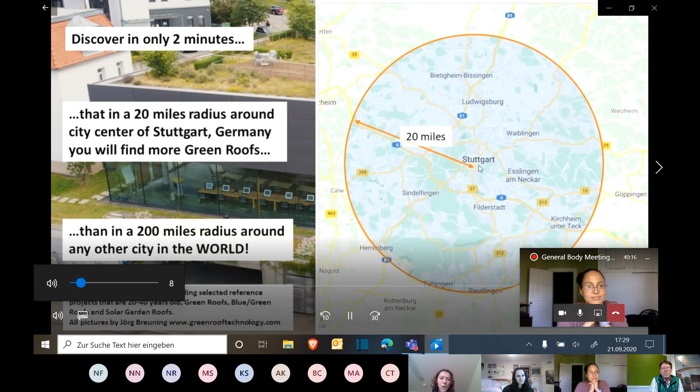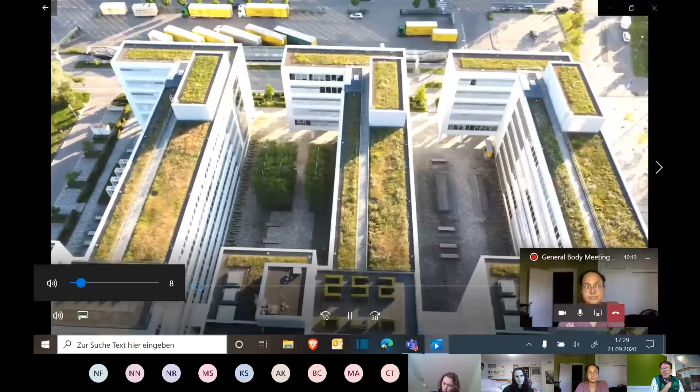This is a movie I took this year, mainly this year, with a small drone in Germany, where I obviously started my career in Stuttgart, Germany, pretty much 40 years ago, a little bit longer ago. And there's a lot of projects I actually did, and they are obviously still existing. However, I was impressed on my own how many green roofs were added in the last 20 years since I'm in the US trying to do the same thing here. So on one hand side, it motivated me to do more here, but on the other hand side, I was also a little bit disappointed because in a 20-year time frame in Germany, the market for green roofs increased super proportionally comparing to the US, where it is still a very slow or very hesitant market.

So we will see some of these pictures also during the presentation again, where I say a little bit more to that. A lot of these buildings are actually schools and universities. They have a very high percentage of green roofs, and combinations of green roofs and solar.

This is, by the way, one of my first projects. I did that in 1982. This is a hospital. That's an incinerator for the trash.

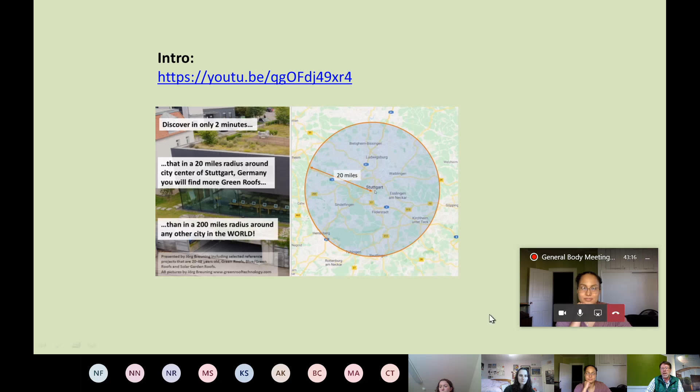So I am working in this business, in the green roof business, but I also started in the landscaping business, which in Germany is actually also responsible for green roofing. So you have to have landscaping certifications, or be a certified horticulture technician, which I am. I started on the 1st of September 1980. The education for landscaping goes 2.5 years, and for the horticulture technician, you need the landscaper trade, then work 3 years in a company, then go back to university for 2 years. So it takes around 7 years to get this title.

In the US, you can get this title in around 6 weeks online. Just saying, that's the difference. So when somebody asks me whether I'm a landscape architect, I typically say yes in the US, because my qualification is so much higher than any landscape architect in the US. However, I cannot get a certification in the US as a landscape architect without running through the typical school system, so I don't have that.

Long story short, about 20 years ago I got a call from an American company, a very small engineering firm, asking me for a green roof on a project in Chicago. I thought this was super exciting, and since I like to travel anyway, I booked a flight to Chicago maybe 3 weeks later to meet this guy. He was from Philadelphia, kind of a crazy guy, but he was talking about the City Hall project in Chicago. We went up there, and I was convinced we could make this project and get the contract.

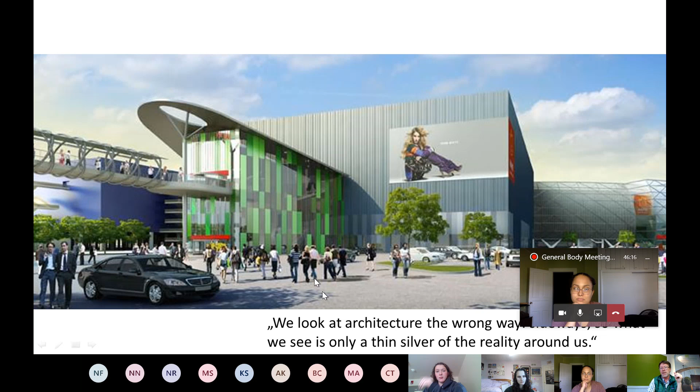I want to start with a point: right now, I want to change your view of things. Right now we are looking at architecture from a ground level—I call it almost a two-dimensional level. So everything might look nice, and we ask ourselves, why do we need green roofs when we potentially have a lot of green, in this case more green color in the picture than other things? So we have to basically change our perspective.

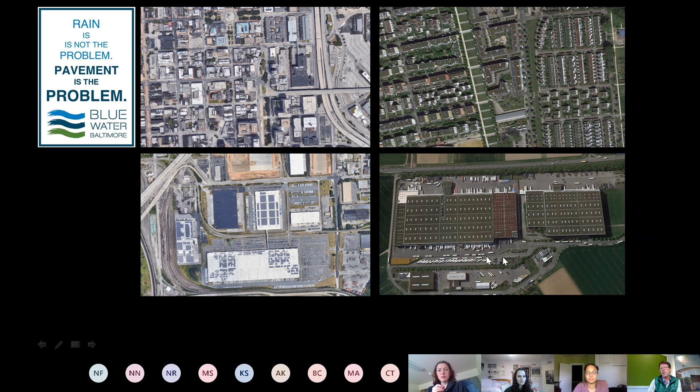And a warehouse in Baltimore. This is 2.5 million square feet, or 57 acres. The roof has around 1 million square feet. On this entire property, there are only 6 trees. The annual runoff of this property is around 61 million gallons, approximately 100 Olympic-sized pools of water running off this property directly into the Chesapeake Bay, which is the 3rd largest estuary in the world and the largest in the US, a very important environment.

On the other hand, this building was optimized for stormwater retention. It has pretty much the same roof size as the property I just showed, but around 1,700 plus trees around the entire property. The annual rainfall is almost the same as in Baltimore, but the annual runoff is only 10,000 gallons, which is a semi-tank truck. So that's a big difference to see.

So green infrastructure and green roofs can make a really big impact. Also, cost-wise, this company, with green infrastructure retaining and keeping this water all on the property, saved around 3 million euros in the construction phase, instead of having all these retention ponds and big piping and clarification systems and all that stuff. So it actually made the whole thing cheaper.

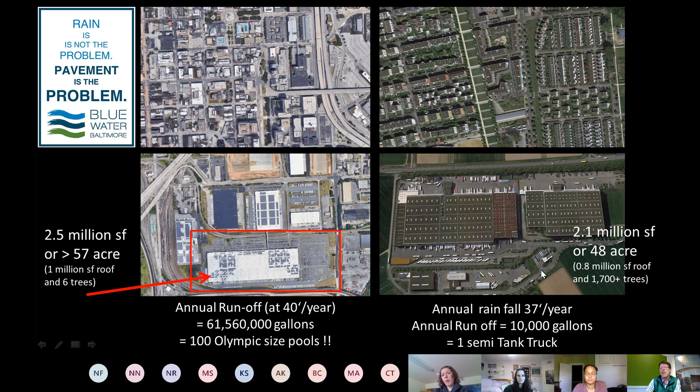So this is, again, this picture. In the 48 states of the US, urban impervious cover adds up to 43,000 square miles. This is basically right now almost the entire size of Ohio that is impervious in the US. It's amazing when you try to get this data and these numbers together.

And it's even more interesting - in Europe it's very comparable, not as big, but comparable. You are adding every year 1,000 square kilometers, or 250,000 acres, of imperviousness. This is, I think, already a critical number with flooding and pollution in the waters around, but it also has, in my opinion, a very high priority to be addressed.

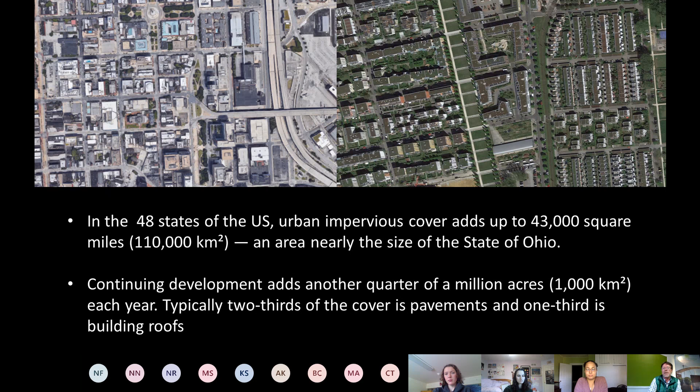Typically 2/3 of the cover is pavement and 1/3 is building roofs. Even if it's only 1/3 on top of buildings, I think it's an interesting aspect to focus on, because the building is already a structure, and typically the roofs of buildings are not used for anything. So there's existing space, open space, that can be much more easily used than, for example, a road.

It's very difficult to cut a 4-lane road down to a 2-lane road and make 2 rows of trees to get some tree canopies. That would be great, but it's very difficult to get through. It's much easier to take an empty space on a building and put a green roof on it.

I think these are some good ideas, but I don't like the way they are executed - they could be done so much simpler. Working with nature, working with plants, is sometimes much easier than people think. It seems to me like Americans are a little bit afraid of nature, which is why they always need a little wall or barrier around nature, so it's not attacking humans. But I think it's the opposite way around.

That means you can change the water runoff also by using porous pavements, where the water goes more or less straight through. This would be something also for new roads, new walkways and all that stuff, because when the water can drain into the ground, it's much easier to keep trees along the street alive, since they have a better supply of water.

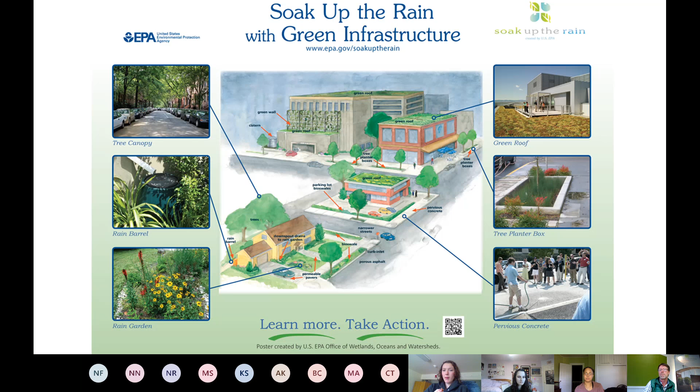I'm trying to maneuver a little bit to green roofs. As green roofs got more and more popular, City Hall in Chicago was certainly a big deal for the US and was in all kinds of media. It's still everywhere. I think with green roofs, people in the US also created the term green infrastructure, because they didn't just want to say green roofs. At the beginning, a lot of people didn't know whether a green roof is just a green painted roof, a copper roof that turned green, a roof with thicker insulation, or a roof with solar panels. So the term was a little misleading at first, but in combination with green infrastructure or living infrastructure, I think it got better explained.

Green roofs are very effective in reducing the environmental footprint of structures, because they utilize existing and unused impervious space. You can implement that relatively easily, and you're basically elevating an environment that had existed in that place before, up to the roof.

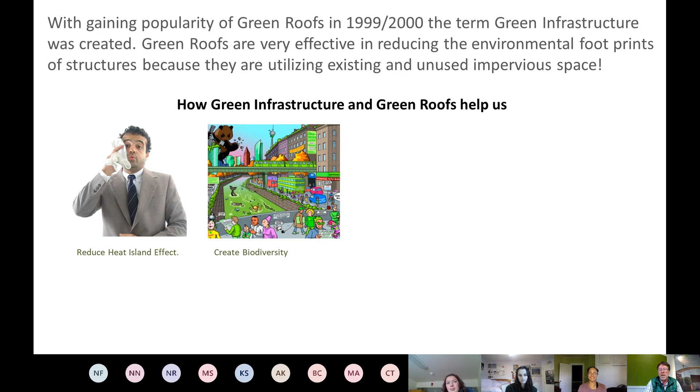If you have more trees and plants on top of buildings, within streets, or around buildings, you can create biodiversity. A lot of people think that a lawn around a building means a lot of biodiversity - I think this is actually the worst case scenario. Lawns should be minimized to very small areas in urban settings, and instead be more diverse, even meadow-style, where you mow maybe only twice a year, just to get diversity, reduce chemicals, and reduce the work. A lawn takes a lot of chemicals and you have to mow it every two weeks. A meadow, like mine, I mow only once a year. I'm always getting a ticket because they say it looks like a mess, but it's just not regularly mowed. But I have honeybees and even snakes here in the middle of the city. I have everything here, and no rats - my neighbors have the rats.

Green infrastructure, especially green roofs, protects the structure against environmental impact. The city of Miami requires at least 20 inches of growing media for green roofs, because they assume some growing media will blow away in a hurricane. I think they haven't gotten the idea entirely, because the roots will hold it together. But even if they lose, say, 5 inches of growing media, it's so fine - more like dust or sandblasting - instead of the entire roof coming up. So the weight of a green roof, for example in a hurricane area, has a very high impact on the entire building and helps protect it.

The waterproofing, the roofing material under the green roof that keeps the roof watertight, is basically protected against UV radiation and against temperature peaks, whether they go really down or really up during the day. So it's a very high protective layer of green roof.

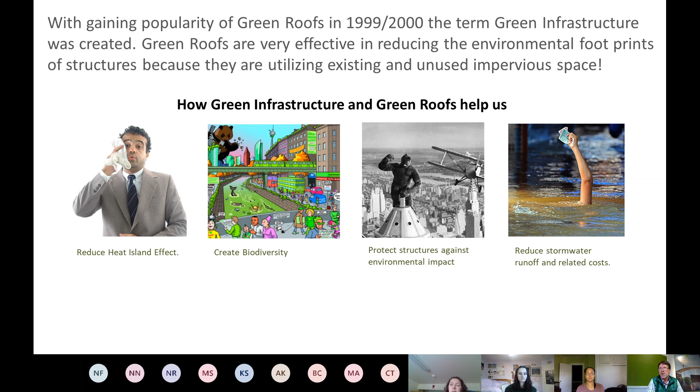Green roofs reduce stormwater runoff and related costs, and these costs can be really high when you think about certain floodings and infrastructure they have to increase because there's too much stormwater, besides the pollution into these areas. So green roofs and living infrastructure hardly reduce the direct energy demand of these structures.

I'm just saying that here, and I'll probably mention that later on. A lot of people say that green roofs reduce the energy use of buildings. From my experience as a European, in Europe there are very strict requirements for how much insulation you need on top of your building. If you add a green roof to that, it doesn't matter anymore because it's already well insulated. But when I see here, and even this old building where I am, there's zero insulation on the roof - sure, then you have a benefit.

But you always need to consider that in summer, when the system is dry and the soil heats up, it's also storing the heat. That means at night, when it cools down, the soil is still almost like a radiator into the roof. So it keeps the building warmer at night, and a little bit colder during the day. In winter, for example, if the system is completely wet and frozen, it keeps the cold much longer than if the roof would be a black roof and would heat up immediately. Even under freezing conditions with sunlight, it would heat up very hot.

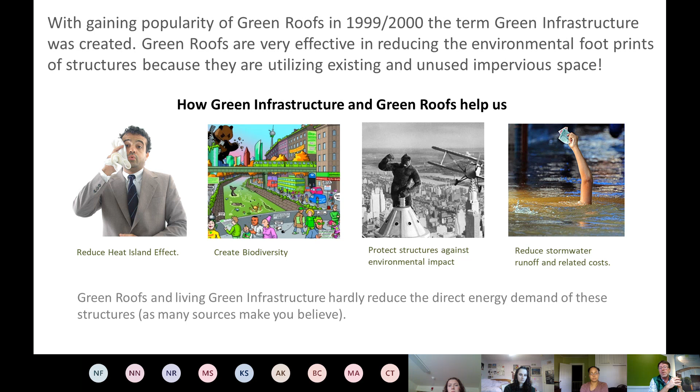So all this research, I think these claims are made by a lot of scientific and wannabe scientific people, that green roofs save energy. In my opinion, they are completely misleading, because the truth is very low - I wouldn't even mention it, but I address it at least a little bit to show it.

So nobody has a question right now, right? Or does somebody have a question? No? Okay, okay, so how does a green roof work?

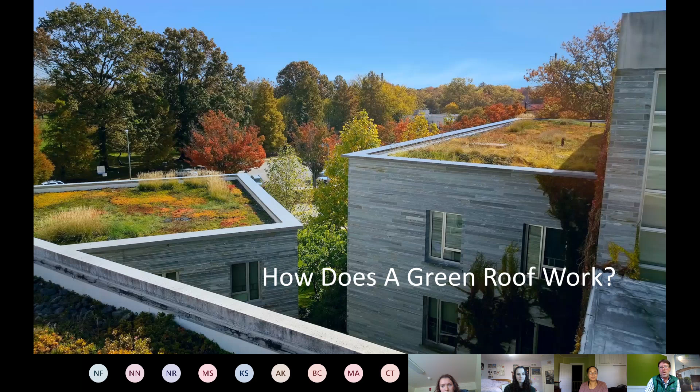This is, by the way, Swarthmore College near Philadelphia. They have around 15 green roofs.

So this is a soil profile of the natural soil out there - everywhere it looks a little bit different. Certain layers in this profile - I think my mouse works here too, yeah - are different in different areas. That means in some areas the base rock is much thicker, or the decomposed rock is thicker or thinner, and the mineral layer is in some areas extremely thick and in some is hardly existing. Then the area that people would call the topsoil, where you have organic parts, can in some areas not even exist, and in some areas can be relatively thick.

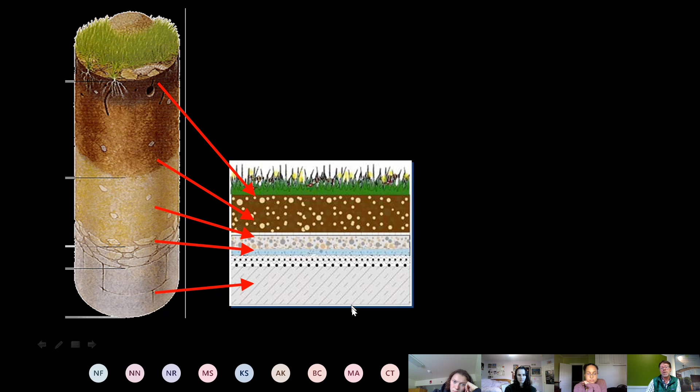In general, experts talk about a soil horizon - there's different names for these horizons. I think that's not important now, but it is more important that a green roof, if done correctly, has exactly the same horizon. It's trying to mimic these horizons, because this is what plants understand.

Plants, when they seed, they need some organic material - they grow much better with organic matter. But later on, they also want to grow down to groundwater level, or to areas where the groundwater rises up within fine capillarity channels within the soil. And we basically do the same thing on a good system, on a green roof.

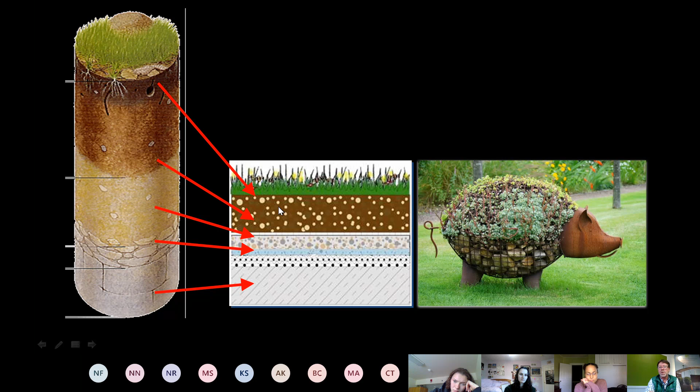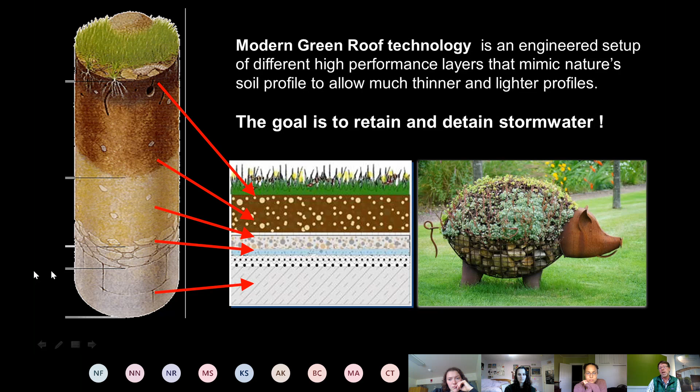You have the roofing material, you have a coarse mineral layer here that retains or detains a lot of water. You have a filter layer - I consider this a filter layer because no organic material can go through it - and then you have a layer with organic material. This picture shows it well: you have this foundation, this bedrock, then you have a drainage layer, and then it basically comes to the growing media level and the topsoil.

So it's an engineered setup with high performance layers. Materials are different here - we often use what we call lightweight aggregates. It's not because of the weight, but because of the porosity of this aggregate. If an aggregate has a certain porosity, it mimics and creates a higher surface area, and a higher surface area creates more fine roots for the plants.

So that means they are spreading out further, and the porosity also exchanges, retains water and nutrients. So porosity is a key element. On a natural soil layer, there's not too much porosity, but the thickness makes it work. On a green roof, we want less thickness, but then we need better materials. The goal in all of these cases is to retain and detain stormwater.

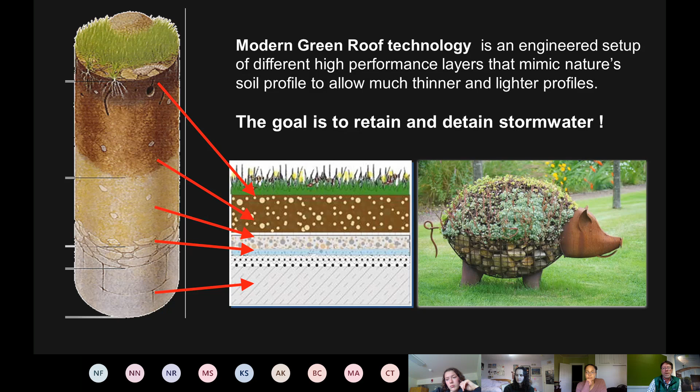Since we have people from all different directions, I want to briefly mention the difference between stormwater retention and stormwater detention. To say it very simply, retention means you have a bucket and you fill the bucket with water, or let the water go into the bucket. It cannot escape unless the bucket is full, and then it overflows to exactly the same amount as you pour it in. This is what some green roofs do, and then they use this water for the plants.

So they take this stored water out and use it for growth in dry conditions. But since it's not slowly released, if a new storm comes in, it would further fill up and then eventually overflow at the same rate as the rain comes down.

Stormwater detention works a little different. It's like a bucket with a lot of holes. So you can pour water in there, and maybe at the lowest hole it starts to come out, but it doesn't come out at the rate you're pouring the water in. So it is time-released water, so to speak. And this is kind of what a green roof does, both. It retains, but it also detains.

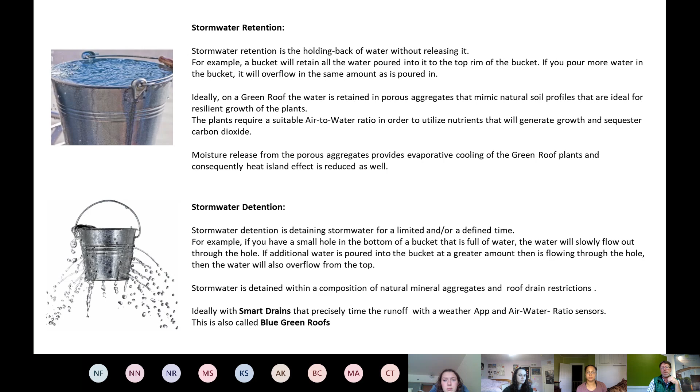So yesterday—meaning in the past—they already did some green roofs. There's the Torre Guinigi in Lucca, Tuscany, and some of the people wanted to go to Italy—I really, really recommend that. This building is around 300 or 400 years old, and they planted oak trees up there that are still growing. In this city, Lucca, 300 years ago it was a kind of prestige thing to build your building as high as possible.

The higher your building, the more prestige, the more you were honored within the city. This guy only had a small property, so it was relatively easy to build it higher, but on top of that, his idea was to plant trees so his tower continues to grow. Good idea—it still works today, 300 years later.

Rockefeller Center in New York has had its green roof for about 100 years now. They had to do some repairs, but some of the original setup is still there. When I look at the soil profile from these old drawings, I can see different soil horizons, and no humus added, meaning there's no organic matter. So they had exactly the ideas I mentioned before, the soil horizons in mind. They understood the soil horizons and were trying to mimic them.

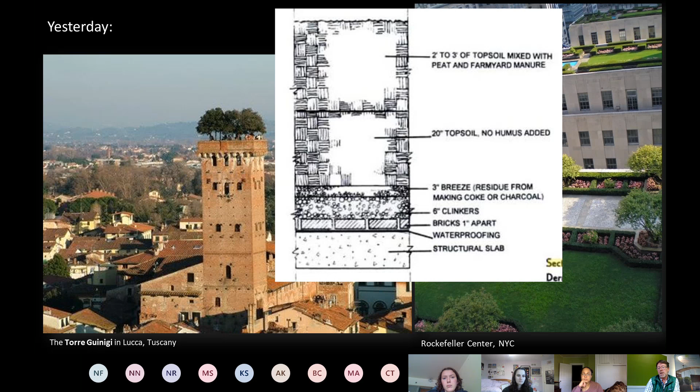For me, this was very important, as I discovered that with the current green roof industry in the US, a lot of people don't understand the basics, and that's why a lot of green roofs are not performing very well. But it was done before here, and there's even a patent on this kind of setup, so it could have been done everywhere, but obviously it was too expensive.

So today we have basically different types of systems, with different depths of soil and weight, and all that stuff. This is just an example. You can make this system even thicker, or even thinner.

The main difference today is that mainly people build green roofs with drainage boards. These are plastic boards. I'm not sure whether somebody can see me here, but this is what it looks like. I can show it a little bit later again. This is done for weight reasons and for drainage reasons. They have good drainage and a very low weight.

But from an environmental perspective, even if a product like that is 100% recycled plastic, I think it's not necessary, because there is a limited lifespan even to this product compared to a mineral lightweight aggregate. If I think about a lightweight aggregate like pumice, this material is already around 50,000 years old, and I can guarantee my client it will make another 500. With plastic, they have issues over time. I'd say in a 100-year frame, they kind of break, and the roots take it apart. Plants also don't necessarily understand a piece of plastic like that. They grow differently in this, and it takes a longer time.

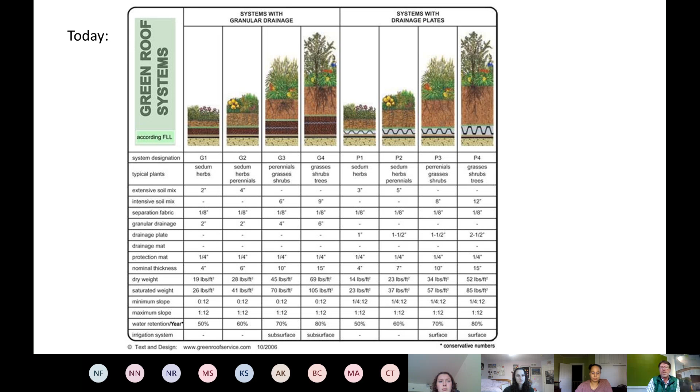Nevertheless, this is where people make money within green roofs. It is as it is. Many things we cannot change. I have to use it sometimes too, for drainage reasons and all that stuff. I think this is good, but I'm always aware that this might not be the last solution.

You see the products here actually also. I could have shown it just here. But anyway, you start on top of the waterproofing with a protection fabric. Then you have a drainage board or the granular drainage from here. You have a filter layer, the growing media—this is an engineered soil also with porous aggregates. And then you have the plants. Could be any plants; in this case, it's sedum plants.

This is tomorrow—a system I've been working on over the last two years probably, and now I'm getting some of the really small, enthusiastic and engaged green roof companies within the US, but also outside the US, in Germany, in Italy, in the Dominican Republic, and also in Saudi Arabia, to create a different system—one that focuses on the health of the plants, but also gives opportunities for water management, stormwater management, and in desert states, for example, irrigation management.

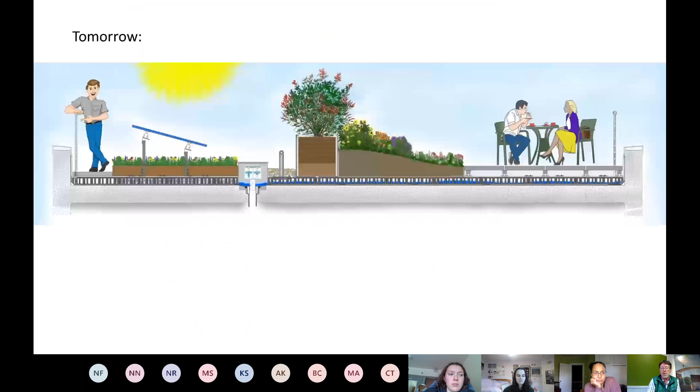The system is, I call it, a platform-based monolithic modularity. The key of this system is a plastic material—unfortunately, a plastic material—but this is an open grid with approximately 90% open space.

Installing this directly on the roofing once the roofing is installed, other companies or workers in construction can actually drive and walk and do everything they want on top of it without damaging the waterproofing. Right now, when it comes to leaks on roofs, this is the number one cause—maybe 50% of roof leaks happen during the construction of the roof. Even roofers, when they have nails or screws laying around, they don't even move them away. They sometimes step into it, and then you already have a leak. So the idea was to create a platform where everything is kept away from the waterproofing, so people cannot damage this roof anymore. This is for the construction at a very early stage.

So in this case, the green roof will protect the waterproofing already during construction. You can also use it as a staging area and all that stuff. And then the next step is that you can fill this up, if you want to, or if it's necessary for a certain project, with the granular media that retains a lot of water and creates the environment plants know about.

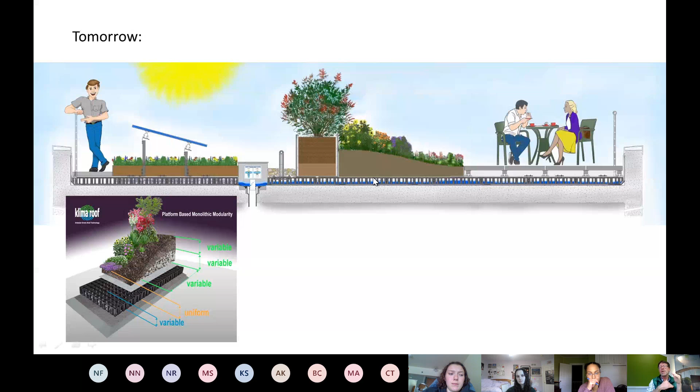Another key element is that things like solar panels, railings, planters, safety equipment, even air systems, can be installed on this system. You have no penetration through the roofing anymore, so everything is safe and disconnected from the building itself. This is the idea, and you can make any depth of system, so it's very flexible.

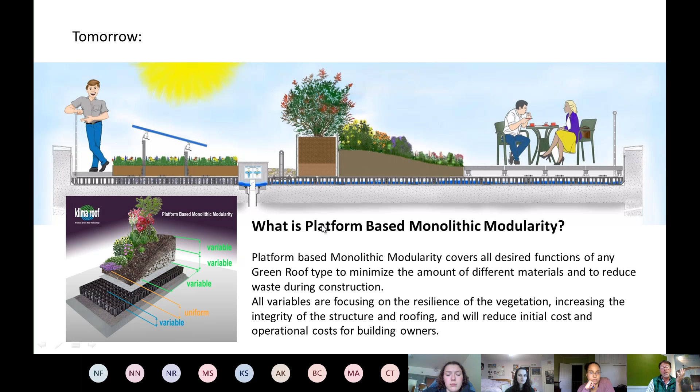The idea was to have only a few materials, so this can be done with 5 different components, and then you can make any type of green roof out of it. This is what I think will be the next generation of green roofs in the US. I hope so.

And by the way, I made it also as an open source system, so all the companies I want to have engaged within the system can use their own components.

This running in the background is a typical stormwater runoff of a conventional, non-green roof. You have the rain coming in, raining and raining and raining, getting stronger, and then the rain stops and you get the runoff. The water basically comes down, maybe with a 5-minute delay depending on the intensity of the rain and the type and slope of the roof — there will be some detention, but not very much.

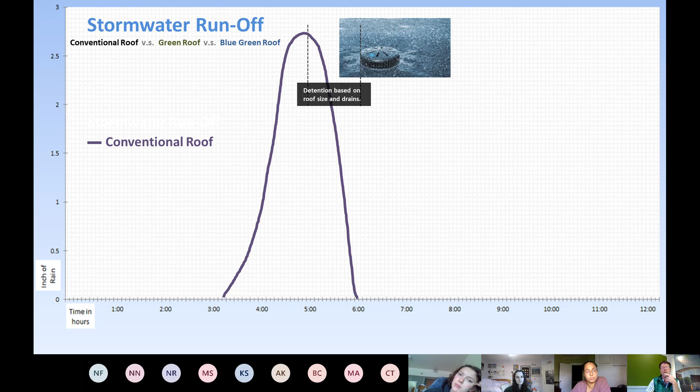When you do the same thing on a green roof — this is a very thin layered green roof system — first of all, you have a certain retention that stays within the system, but then when the rain stops, the runoff is really delayed.

This is why green roofs are really popular right now. This hour, 2 or 3 hour delay of the runoff is a big relief for city sewer systems and drain systems within the city. This is what they are looking for.

It can be done with different components, more delayed or less delayed. I'm hesitant sometimes with sponging elements like mineral wool, which people use as a growing base for green roofs. These systems retain too much water, more than the plants can deal with. Plants want a certain air to water ratio.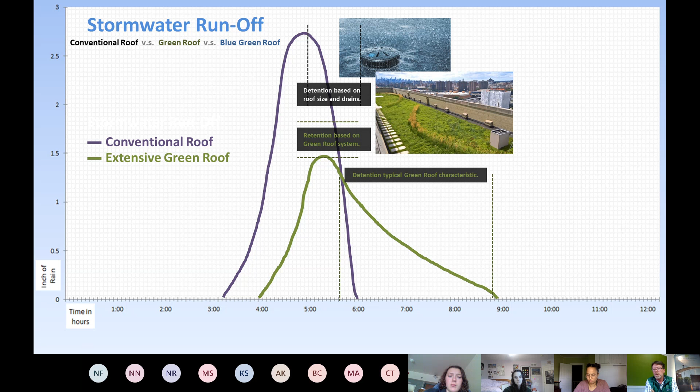And then we have — is that working? Oh yeah. Then we have a kind of blue-green roof, or I call it here a blue paver roof, because you can also just have pavers on it. So this system basically releases some water before the rain.

It is connected with an app to the roof drain, with a weather app, and it tells the roof drain we are expecting rain in an hour — give us as much capacity to hold the water, so drain it, and then it will drain. Then the rain comes in, and the system will decide at a later point whether too much water is retained or whether another storm is coming, and accordingly it will either open the drain or partially open it when the rain is gone and the sewer systems are able to take additional water.

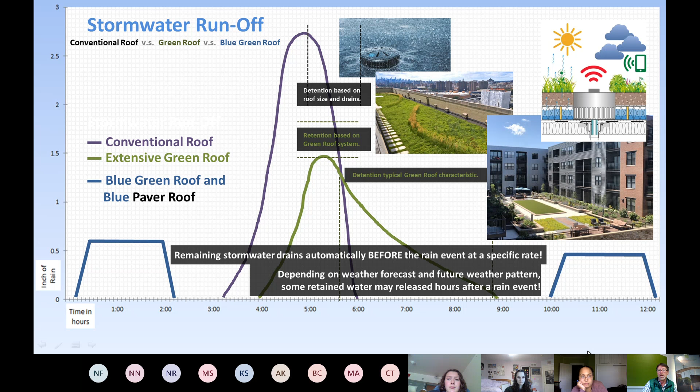So this is kind of the smart controls for green roofs. This is the next step, and the monolithic platform system would support something like that very easily and simplistically. This is the future, so to speak, but we are here right now, which is already a big relief.

So what are the considerations for green roofs? I think it's very important — I got a lot of calls from people, whether in the neighborhood or from others, saying we have this row house built in 1920 with a flat, slightly sloped roof, and we want a green roof on top of it. In most cases it's not working, because the structural capacity just isn't given on these buildings, which is really sad.

Because in America, more residential homes, especially in city areas, have flat roofs than in Germany.

In Germany, a lot of residential houses, also within the city, have sloped terracotta tile roofs, and it's very difficult to make a green roof there. It's possible, but cost-wise it makes not really sense. So there would be great potential, and I've developed, for Baltimore's planning commission, a couple ideas how you could connect 10 row houses and cover them with one roof that's structurally sitting on the walls of the buildings, and then build a green roof on top of it.

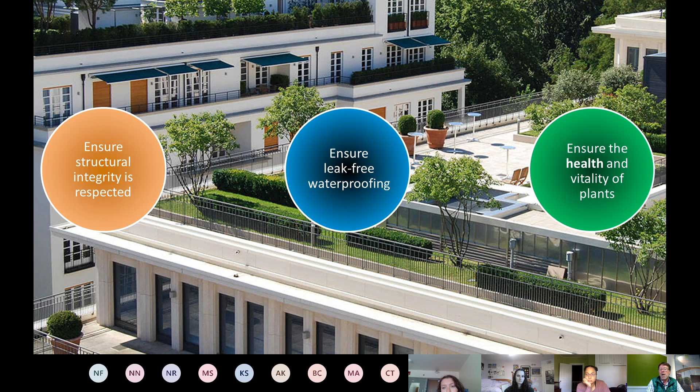And then I always get the question, what are the costs for a green roof? I always try to answer it this way: a green roof is potentially $15 a square foot. If it's a deeper system, it's maybe $25 or $35. It could be $45. If you have amenity space, it could be $100 per square foot. It all depends what my picture is of the green roof and what I want to have.

But then, as an alternative, you could also look into riding a jet ski in the backyard. This is priceless — and pumping out the basement, actually.

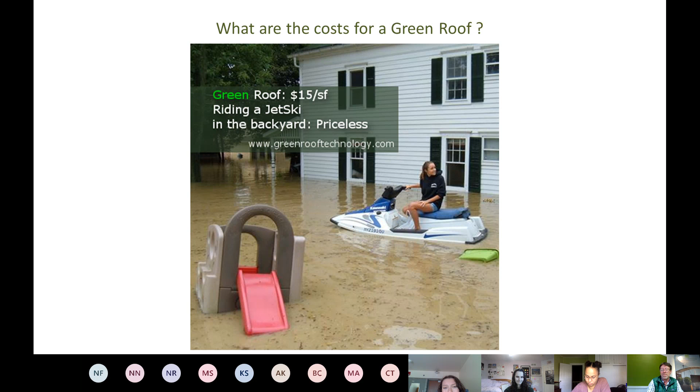So I'm getting closer to the end, and I'm not sure whether everybody is exhausted, but I think I have some time for questions.

So what are the incentives for green roofs? I call it incentives and benefits at the same time. By the way, this is just finished - this is in Düsseldorf, a shopping mall, and they planted, I think, around 150,000 or 180,000 trees in planters all around the building and on top of the building. This also has a smart irrigation system with the water, so it can control the system.

But what's even more important, there are little rails behind this where they can run an automatic hedge trimmer with a vacuum that keeps these trees and hedges always in the same shape. So it's almost a fully automated system. Very interesting project. I wasn't able to go there, but maybe this is on my list for the next vacation.

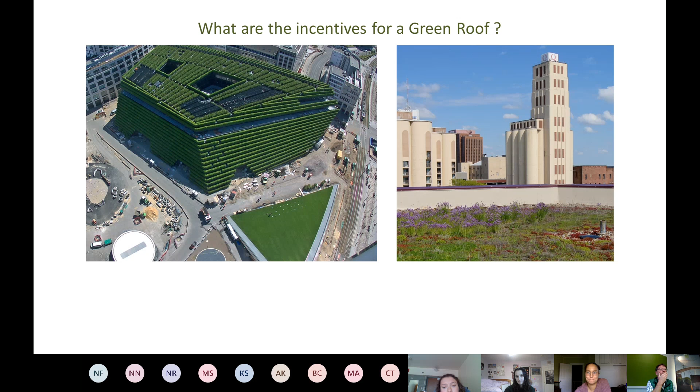This picture, this is in Akron, obviously at the University of Akron. I'm not sure whether it looks like that today. I took this picture, I would say, 4 years ago.

So what are the incentives? Does it show? Yeah, so green roofs, green infrastructure, putting that together improves stormwater management. This is the major issue within the United States - it's stormwater.

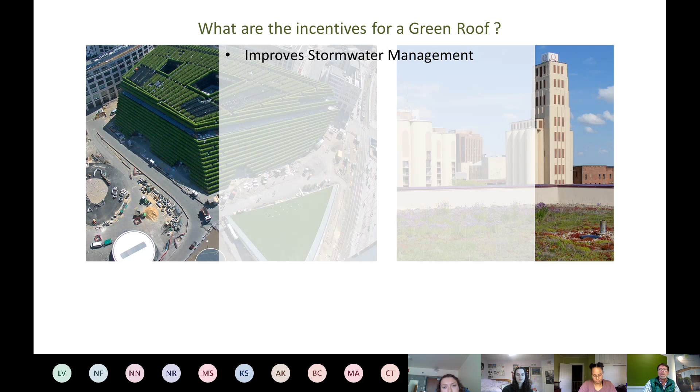A lot of cities and places don't admit to that, but that's what makes the water bill in many places super expensive. It also reduces stormwater fees. With green roofs or good stormwater management on your property—and green roofs are probably the best and easiest to do—you can reduce a lot of your stormwater fees, and these fees are going proportionally up in the next year. So basically a green roof will pay for itself in the end.

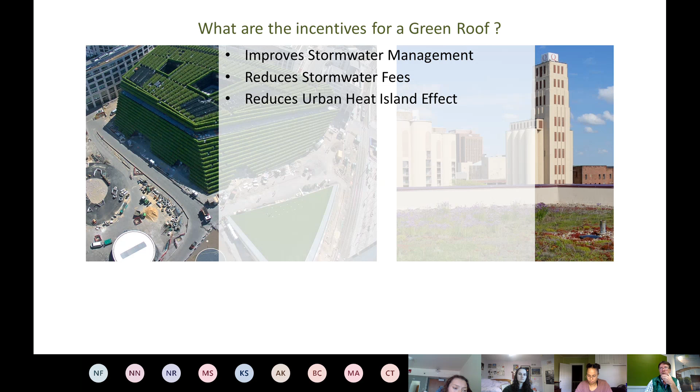It reduces the urban heat island effect. I mentioned that at the very beginning—green, evaporation, cooling, shading, everything is there.

It improves air quality, since plants breathe in and breathe out, capturing some of the carbon and releasing oxygen. They also do it the opposite way around, depending on the daytime. But overall, if the plant is growing and getting bigger, it will store a lot of carbon within the plants, so it certainly improves air quality. Also, all the leaves act like little filters in an urban setting with high pollution.

It improves the efficiency of mechanical equipment—having an air conditioner on a roof getting air intake from a green roof is much cooler than from a non-green roof, where the surface temperature is much higher. It also reduces greenhouse gas emissions.

This goes in relation with reducing the urban heat island effect. If you reduce the urban heat island effect, you have less energy needs for air conditioning and even heating and cooling. I call this the indirect energy savings.

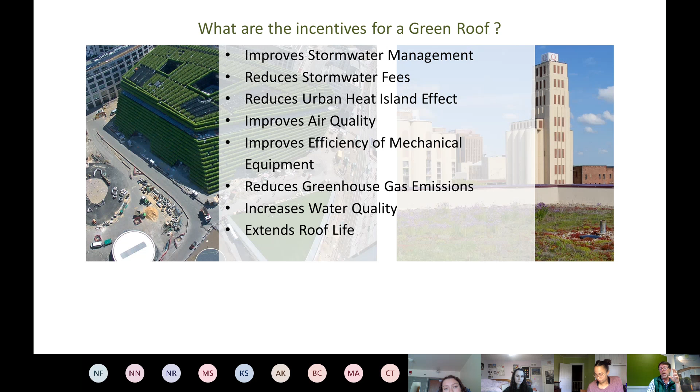It extends the roof life. I think this is a very big thing if the roof is done right in the first place, and this is where my industry, the green roof industry, is still trying to emerge to get good craftsmanship for a roof. Then it can extend the roof life. I've shown a project that's 40 years old, and they're not intending to replace the roofing for the next 20 or 30 years. So I'd say it can extend the roof life by at least 2 times, more likely 3 times.

Big saving, big payback. It also provides urban amenity—you can sit out in the green directly on your building. You don't need to leave it anymore.

It increases the value of the structure, which goes a little bit with the amenity. A lot of buildings in New York get really high rent or sell at a really high price if there's a green roof or green amenity space involved. So it certainly increases the value of the building.

And then there's potential reduction in cooling costs—I think not directly, more indirectly through the cooler air. A green roof is also typically eligible for PACE financing or for grants.

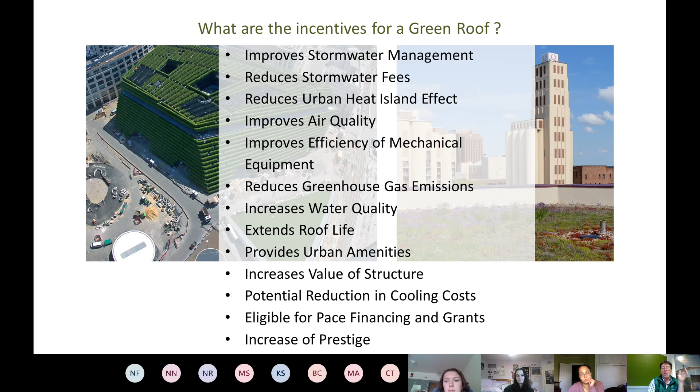And for sure, if you have a green roof, you are the hero. It's a prestige thing, and I think this is sometimes the most important part in the US. On many projects I work on, you can put this argument on top because they just want to look good, and then they don't care what it costs. But I don't care either way—it works for the environment, and that's good.

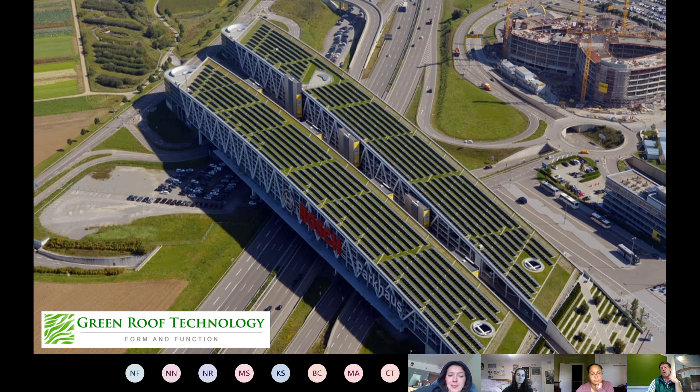All right. Okay, dokie.

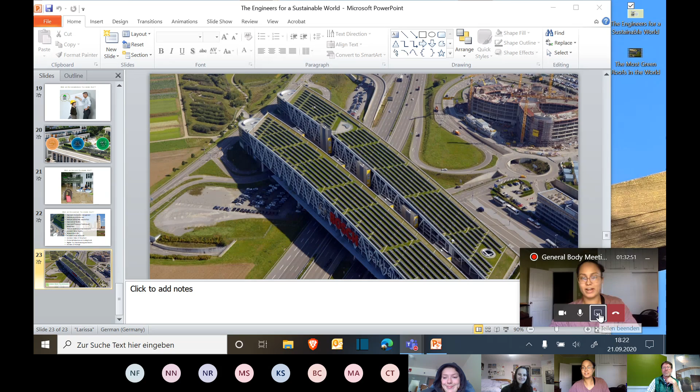So I was wondering how the green roofs handle large amounts of rainfall. There's a lot of hurricanes going on with climate change, and they're expecting more intense weather in certain areas. So I wasn't sure what happens, especially if it's a retaining green roof. Does it just flood? Are there gutters around to deal with that flooding water?

That's a very good question. One reason why I worked on this development for the next generation was actually climate change. This system is able to take up a huge amount of water, and you can adjust it. You can make the open space thicker so you can get a full hurricane sitting on the roof for as long as you want, until all the floods on the ground are gone, and then you release it. You pull the plug and it goes. So with this system, you can capture a huge amount in a very short time.

This engineered soil is made to run the water basically vertically first, almost like in nature. I have seen green roofs where this isn't considered, where they just put some sort of dirt up there - it was dirt, not soil. Then it clogs up, and the water runs on the surface of the soil and takes up material from the soil, and then you have almost what you have on the ground. You don't want that on a green roof, so you do it differently.